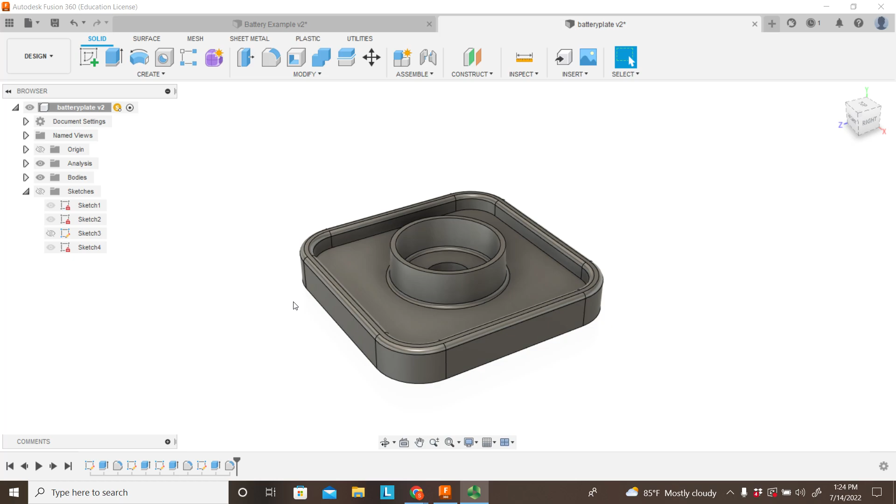All right, today we're going to create the battery plate for the flashlight, and this is what the final product will look like. So we're going to actually start with the battery. So we're going to create the battery plate from the battery. So go open up your battery and then come and do a save as. So we rename it so we don't lose the battery file, but we're going to create the battery plate.

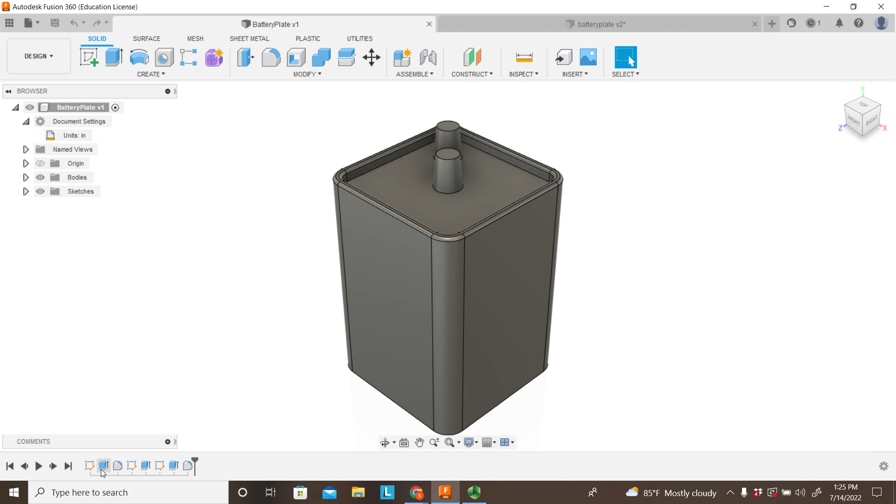So do a save as in the same file. And now we have our battery. So the first thing we're going to do is we're going to change the extrusion. So down on your timeline, you have your first sketch, and then you have your first extrusion. If you right-click on that extrusion and hit Edit Feature, instead of extruding that 2.1 inches, we're going to change that to just 0.4.

And everything changes. So there is our battery plate. And since we created these sketches on the top surface there, they get moved when we change the height of the extrusion. It changes with that. So now, instead of having these terminals coming up, we actually want to have holes.

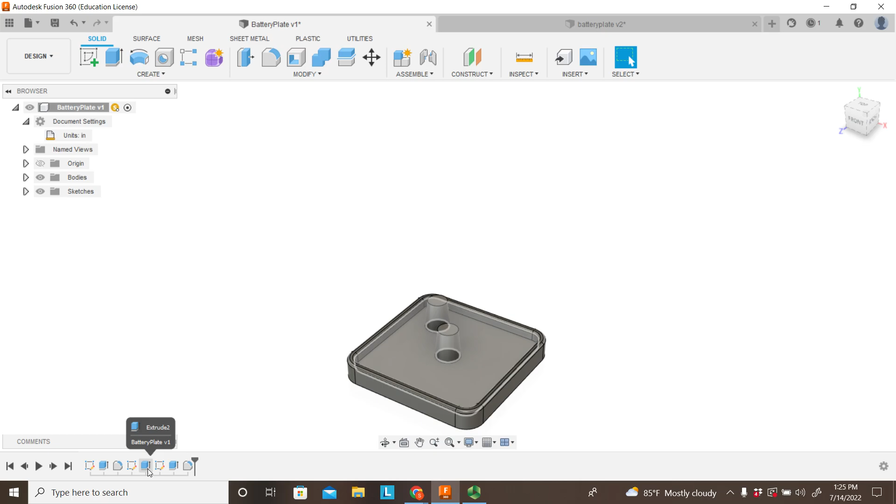So I'm going to go to that extrusion, which is the second extrusion in my timeline. I'm going to right-click, hit Edit Feature, and I hit the wrong one, sorry. I'm going to hit Cancel. I'm actually going to go to the third extrusion. The second extrusion was the cut of that, so we actually need to go to the third one. I'm going to right-click there, hit Edit Feature, and instead of these joining, I'm now going to go and cut.

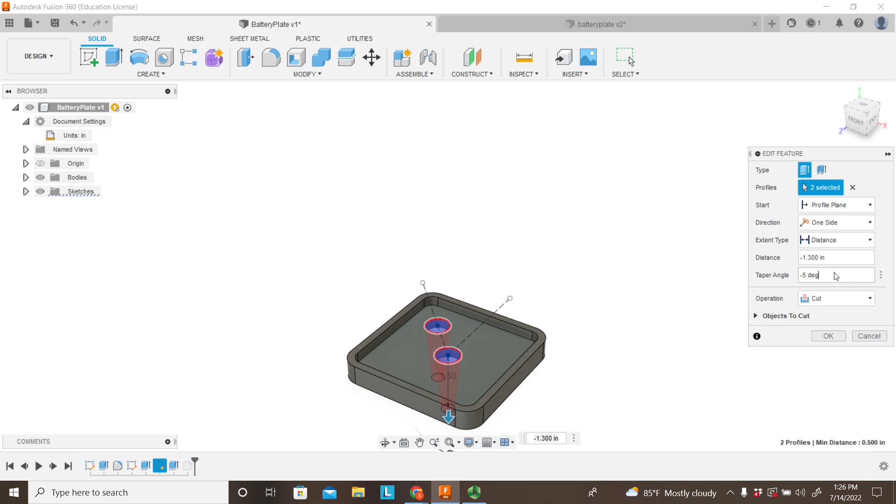So we're going to come here and do a cut, and I don't want to have any angle in the taper, so that will be 0 there. And really, the distance can be, we just need to cut all the way through. It's 0.4, well, it should be less than 0.4 because it's going down, but it doesn't really matter how far. You just want to cut all the way through with no taper angle. And hit OK. So now we have our 2 holes for the terminals.

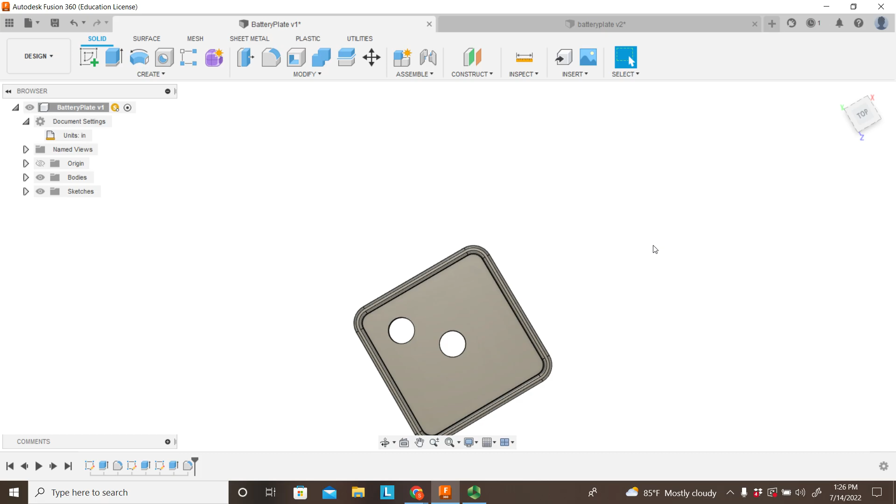All right, so I'm going to look at this top surface, and I want to create a sketch that's on that inset. So I'm going to right-click in there and create a sketch. And I'm going to create a circle that starts on the origin. So again, make sure the origin is blue, click and drag out, let go. And that circle will be 1.1 inches.

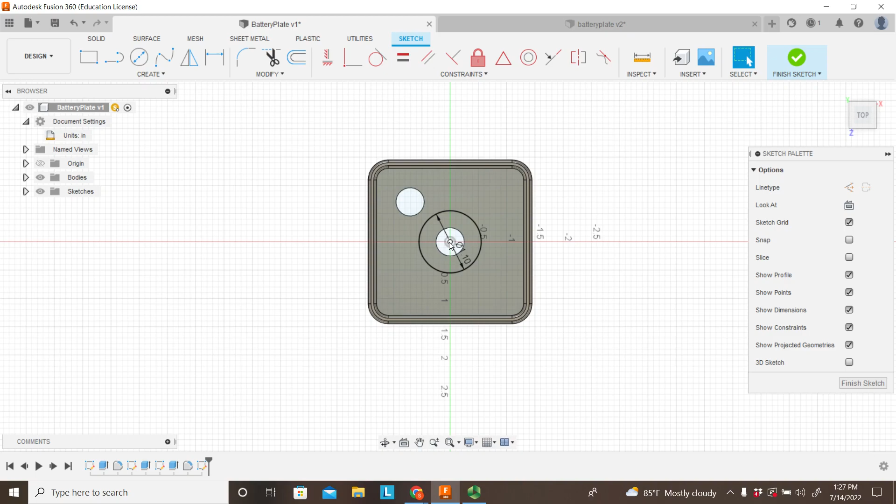And then I'm going to do another one that is also starting on the origin. Hit that circle, drag it out, and this one will be 1.3 inches. So 2 circles there, 1.1 inch and 1.3 inches in diameter. And again, if you look, it should be on that surface that is inset there.

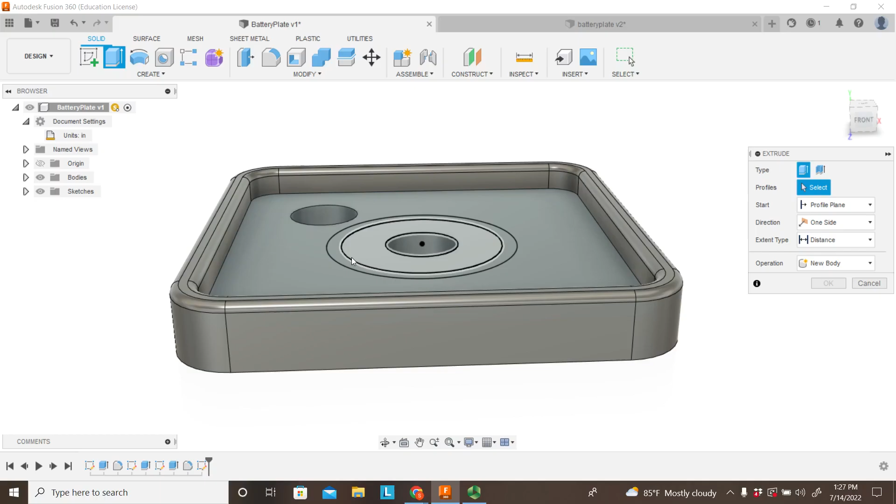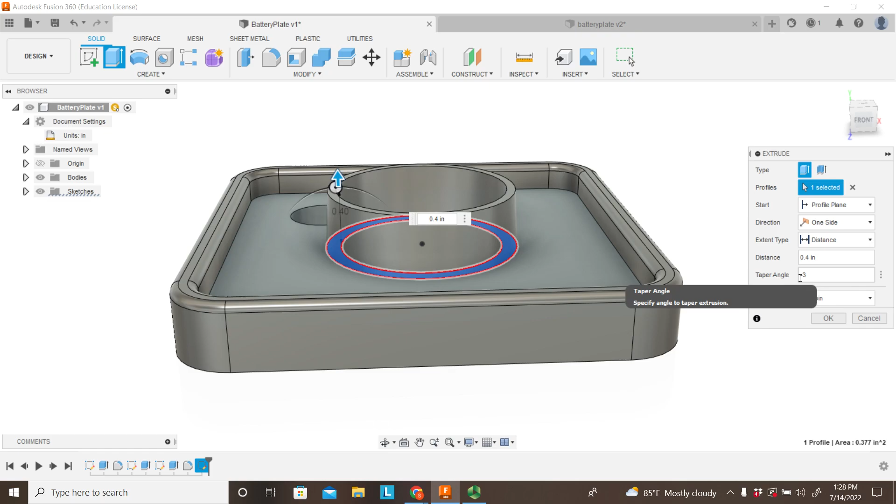So I will finish my sketch, and then I'm going to extrude, and I want to select in between those 2. So I'm going to extrude up a ring that's created by the 1.1 and 1.3 inch diameter circles. So I'm going to extrude up 0.4 inches, and I do want to have a taper, and the taper will be 3 degrees. And again, notice how it tapers out. I actually want it to taper in, so I'm going to put a -3 so that it tapers in, and it will be a join.

And hit OK. So there is my battery plate, and the last thing I need to do is add a little fillet around here. So I'm going to come here to fillet, and I want to select this inside edge. So you can get this edge. Well, I'll select the outside edge first, maybe that'll be easier. Oops, I have rule fillet, so let me just select fillet, that'll make it easier.

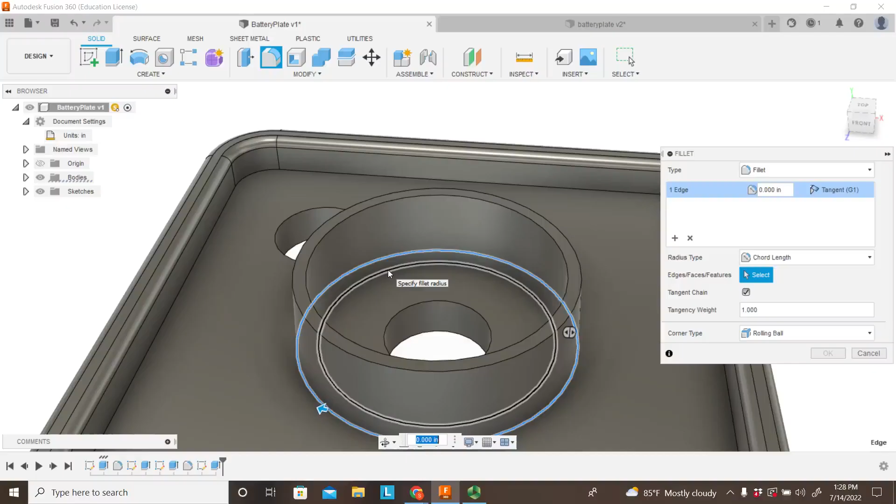So I'm going to select this outside edge of that circle and then the inside edge, and make sure you just get the edges. So I have 2 edges, one on the outside and one on the inside at the bottom. And that should be 0.04. And hit OK. And now I have my battery plate. Much easier than starting from a brand new one if we start with the battery and edit.